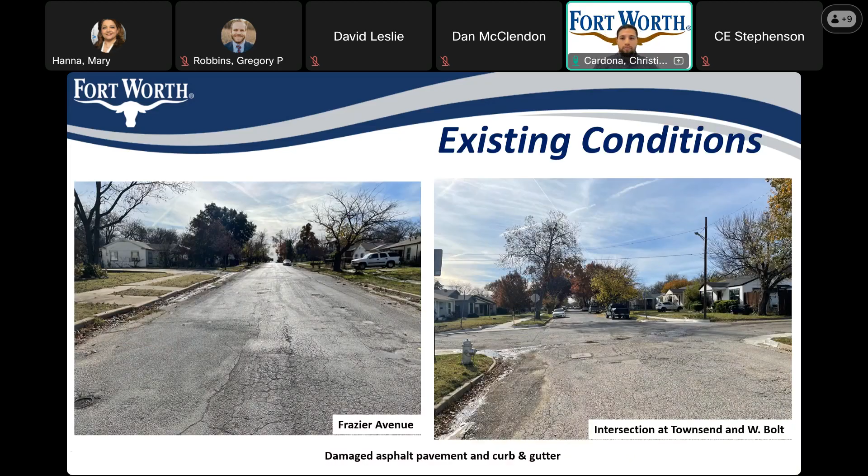Next we'll move on to a couple more photos of the existing conditions. You can see similar conditions of deteriorated asphalt all along these roadways of Wayside and Townsend. You can also see some damaged driveways and sidewalk all along Wayside Avenue. And next are just some additional pictures, just showing some damaged pavement and missing curb and gutter along 8th Avenue.

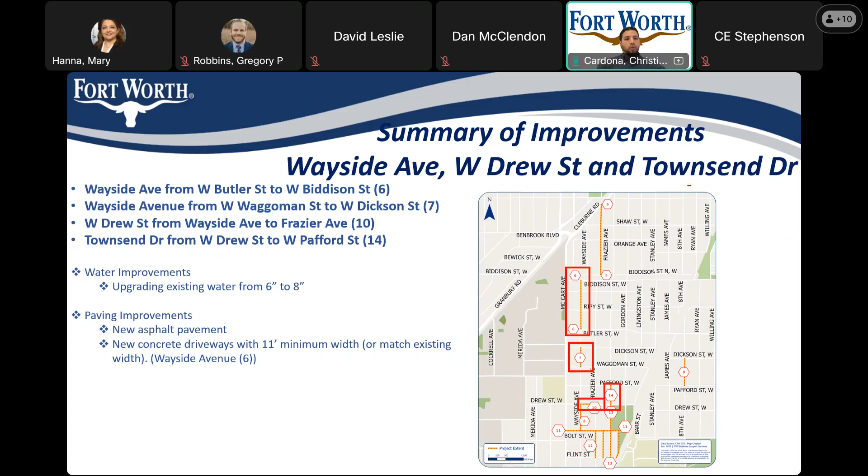Next, we're going to go ahead and move on to construction info. This is essentially just a list of frequently asked questions that residents usually have before the construction phase starts.

So first off, why are we doing this project? As of May 2022, residents of Fort Worth voted to pass a bond program to fund street reconstruction projects and target locations most in need of improvements. In addition to the 2022 bond program, as mentioned previously in the presentation, TPW is partnering with the water department to replace any utilities in need of improvements.

Additionally, you will also receive a 1-day notice on your door before construction starts.

So will our water be turned off? During the construction of the new water line, there will be a few times, and at those times, there will be a few hours that the services will need to be turned off. There's one time to transfer the existing line to the temporary water line to allow the contractor to install the new line. And once the new line is installed, they'll have to turn off the water to transfer from the temporary line to the new water line that the contractor just installed. You will be notified before that water is turned off.

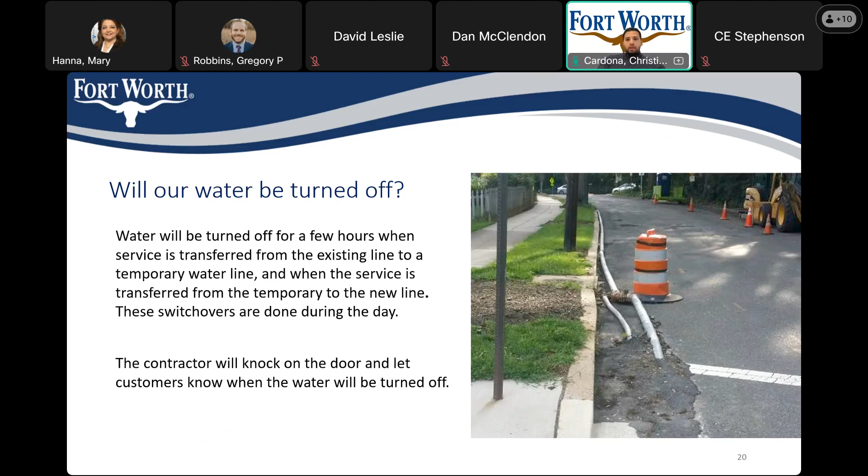Do you replace the water service line up to my house? As part of the project, the city will replace the existing water meter, the meter box, and the service line. So the service line will be replaced up to the property line.

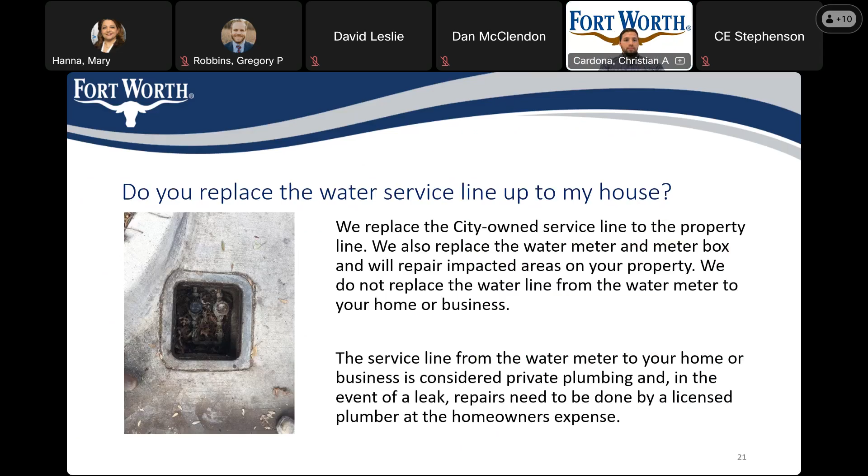If you see running water down the street, don't turn it off. As part of the construction process, the water line has to be flushed and tested to ensure it is free of any contaminants. This is just part of the construction process, so please don't make an effort to try to turn off the water. It's just part of the construction process to make sure that it's flushed and tested.

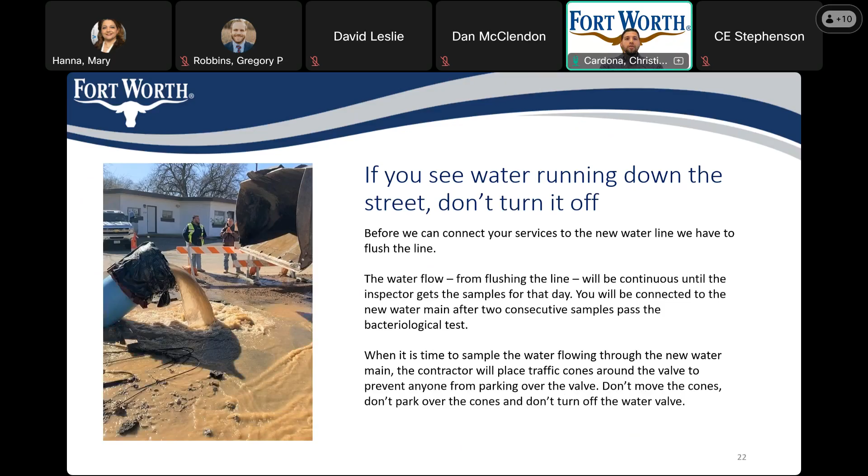So how does the temporary line impact my home and water bill? During the water installation, your service will be connected to the temporary water line. During this time you are connected to the temporary line, your water bill will be based on previous usage.

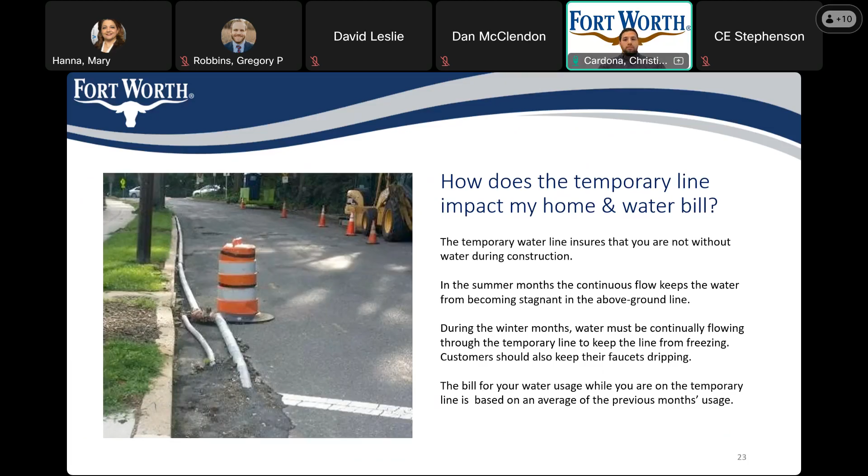Will you need access to our property, or will our services be disrupted? In most cases, we will not need access to your property, as all the work will be within city property. However, in the case that we do, we will let you know ahead of time. Also, you will not be interrupted during the installation of the sewer service.

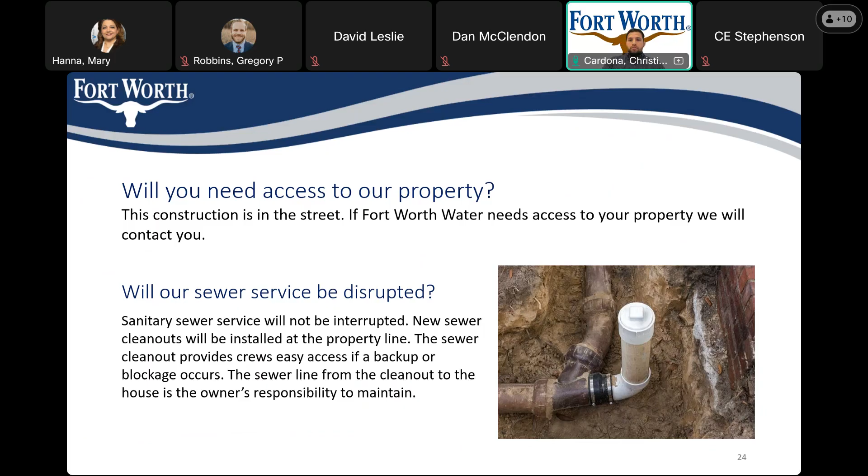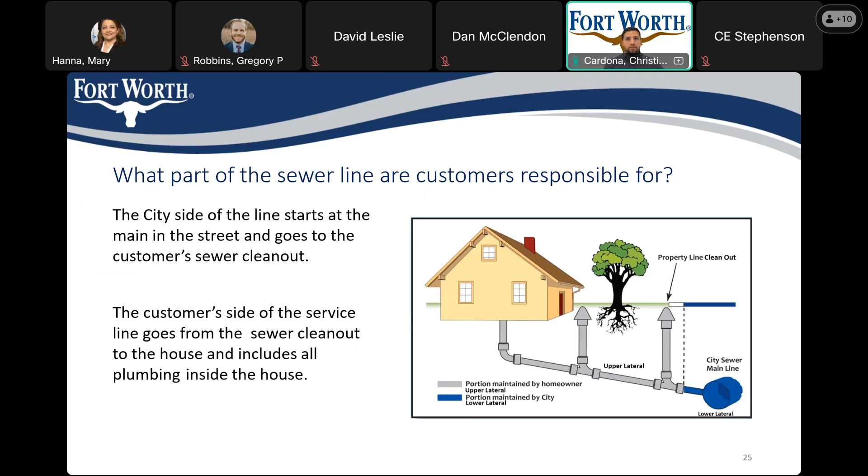Will the construction affect my irrigation? In the case that you do have a sprinkler system, the contractor may ask you to turn it on to locate it before starting any work near those areas.

Are we getting new curb, gutter, and sidewalks? All curbs and driveways will be replaced on bond-funded streets. For water department funded streets, limited portions of the existing curb and gutter will be replaced. Sidewalks will be included in the majority of the bond-funded streets.

Will I be able to access my driveway? During most of the construction timeline, you will have access to your driveway. The only time you will not have access is if the contractor is paving directly in front of your driveway or replacing your driveway itself. But they will coordinate with you ahead of time to make sure you know when your driveway is not accessible.

What happens if my property is damaged? The contractor is responsible for taking before pictures and videos, but we also encourage everyone to take their own before pictures and videos in case property does get damaged.

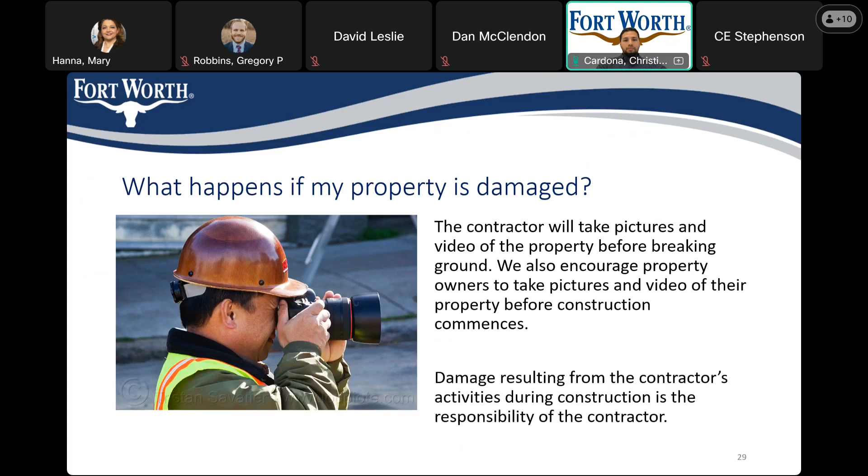Will there be lane closures during construction? During construction, there will be lane closures during the water and sewer installation, as well as for subgrade preparation and paving. There will be signs on each end of the roadway to alert motorists of this lane closure.

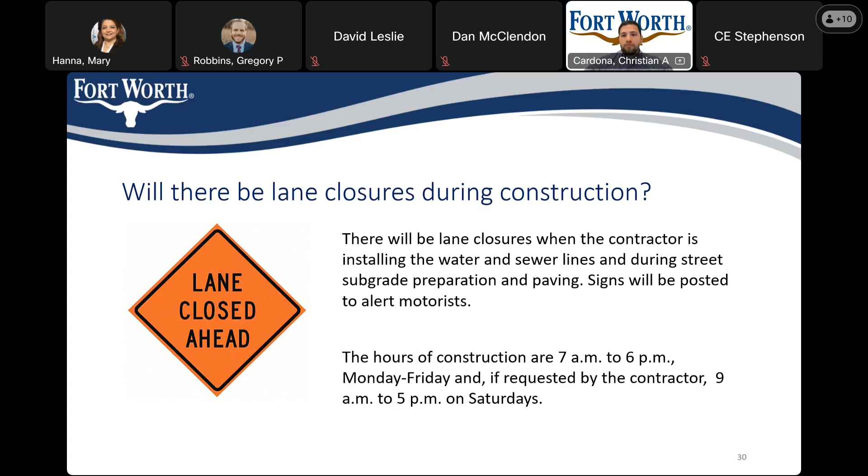Will the city's trash truck be able to pick up my trash and recycling during construction? In the case that your side of the street is closed, the contractor will move the trash to the opposite side of the street so that it can be collected for all of the residents.

We'll go ahead and move on to construction phasing and schedule. Here are some typical photos of the construction process. For these type of projects, water and sewer line installation will be first. Once that is complete, the contractor will install temporary pavement to allow traffic in and out until the paving contractor starts their work on that specific street.

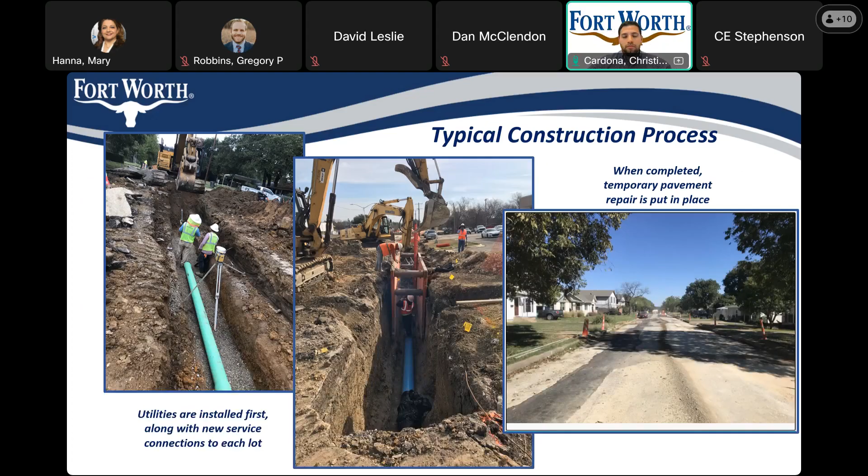Here are some typical construction photos during a concrete pour. This is the concrete construction process. For concrete streets, existing curbs, driveways, and pavement are removed. Then pavement and curb are installed together, and driveways are installed last.

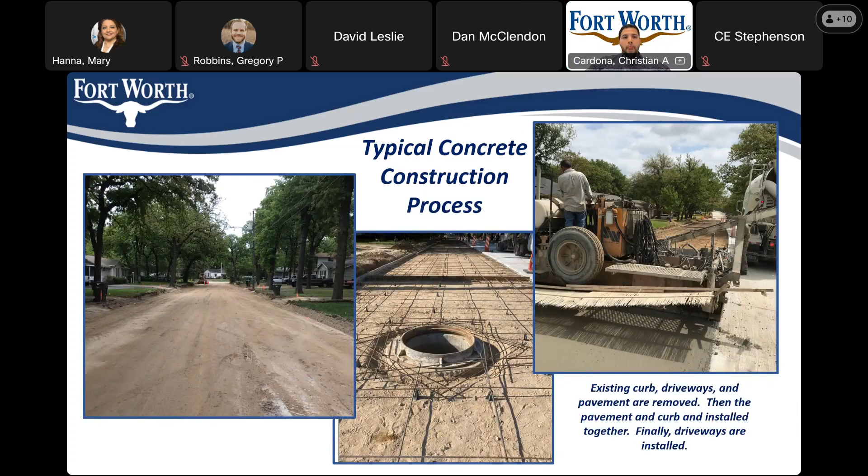For the typical asphalt construction process, existing curb and driveways are removed and replaced first, followed by the demolition of the pavement itself, and the installation of the asphalt pavement follows after.

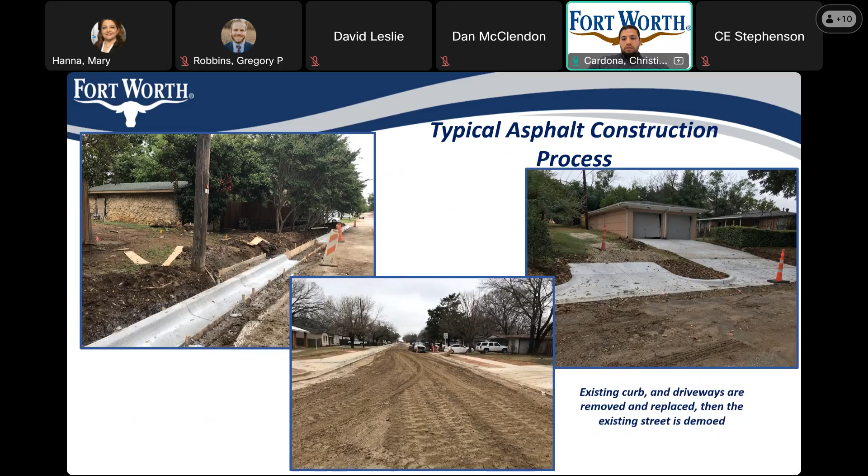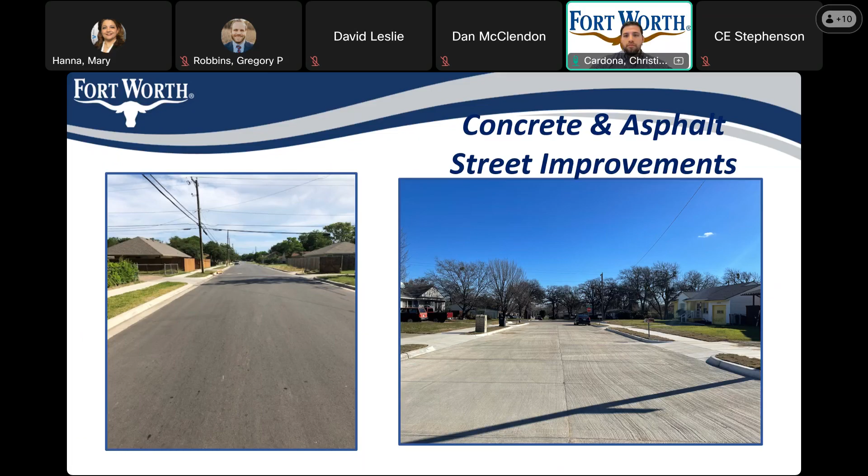Utility improvements for Carver Drive, Fernando Drive, and Prevost Drive are anticipated to start April of 2025 and finish in July of 2025, followed by paving improvements anticipated to start in September of 2025 and run into January of 2026.

For Fraser Avenue, Townsend Drive, Boat Street, and Drew Street, utility improvements are anticipated to start in May of 2025 and end in February 2026. Pavement improvements are anticipated to start in January of 2026 and end in June of 2026.

For Fraser Street North and Wayside Avenue, utility improvements are anticipated to start August of 2025 and end in February 2026. Pavement improvements are to start in October of 2025 and end February 2026.

For 8th Avenue, utility improvements are anticipated to start sometime in December of 2025 and finish in February 2026. Pavement improvements for 8th Avenue are anticipated to start in February 2026 and finish in July of 2026. This brings our finished construction to sometime in July of 2026.

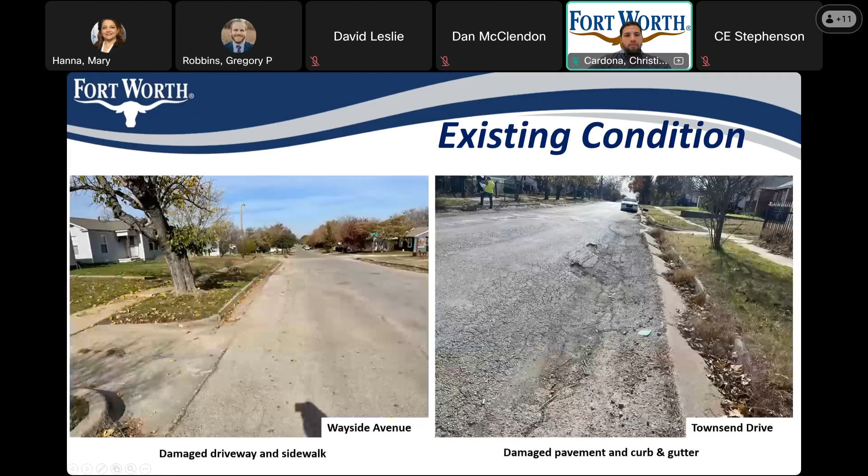Okay, the next question I see in the chat is, who do we speak to if we want to add a school speed bump on our street, since McCart is the next big street and cars drive on Wayside to avoid slower speed limits but go extremely fast? If you would, please send Christian an email with your concern separately, and we will make sure that gets to the correct people.

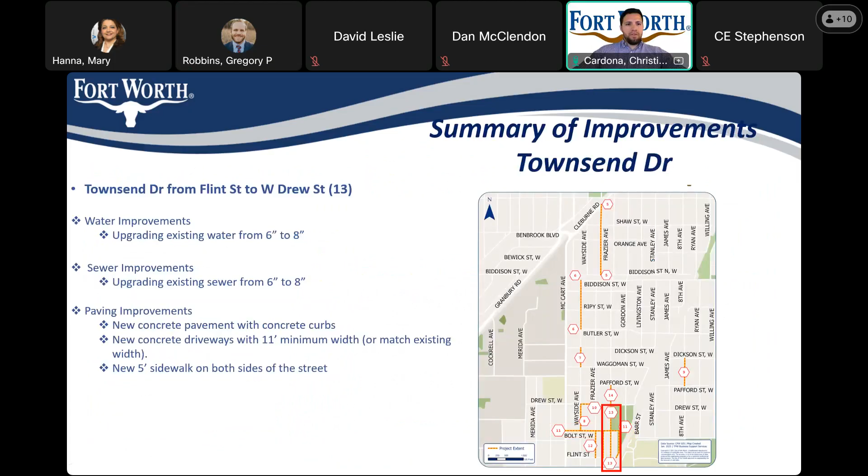There's a question: can you please pull up the slide again showing which streets are water department funded and which are bond funded? Sure, Christian, can you go back to that slide? Yes, I'm going over there. Give me just a second, sorry. All right, now the slide's pulled up, and on the very end of the street limits there'll be a dash, and they'll have either bond funded or water department funded. So that's how you'll be able to decipher which one's which.

And I believe there was a link sent by CE Stephenson of when their bulk trash is picked up, their schedule. But we could take a look into that with Dan McClendon, the contractor, and ensure that bulk trash is picked up. I'm assuming it's probably the first weekend of the month or second weekend of the month. I think that's how they usually do it.

Okay, so we did get a response. Regarding bulk trash, from Dan McClendon: we have equipment that can move bulk trash to a place on the street where it can be accessed. There will be very few times during the job that this would be an issue. So it sounds like the contractor does have equipment to move the bulk trash so that it can be picked up.

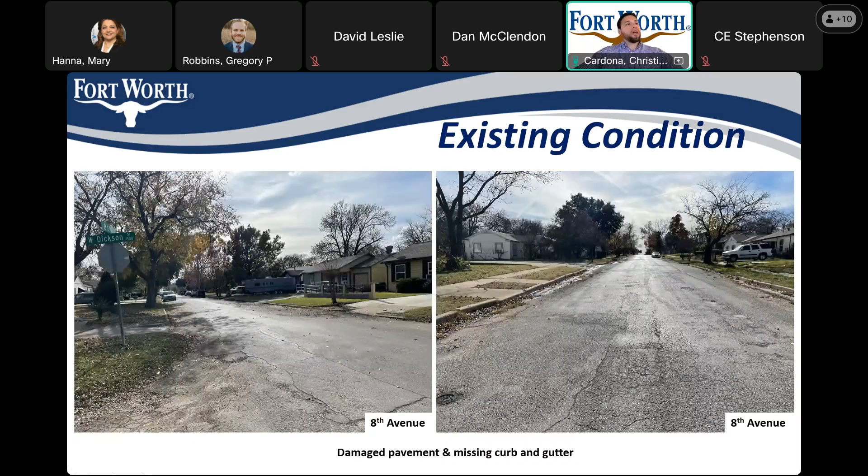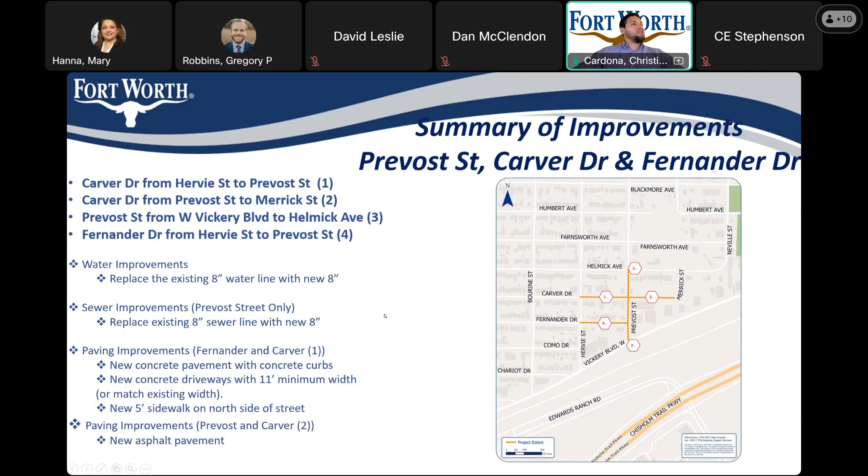Another question from Juan - he joined late and asked about replacing water services on Wayside Avenue. We are replacing water lines on all portions of Wayside Avenue, getting a new water line and new services all the way up to the property line. These will also be getting new meters, and where there are existing meters, they'll get new meters and new meter boxes. There are a couple of portions of Wayside we're doing, all with proposed new water lines to be installed.

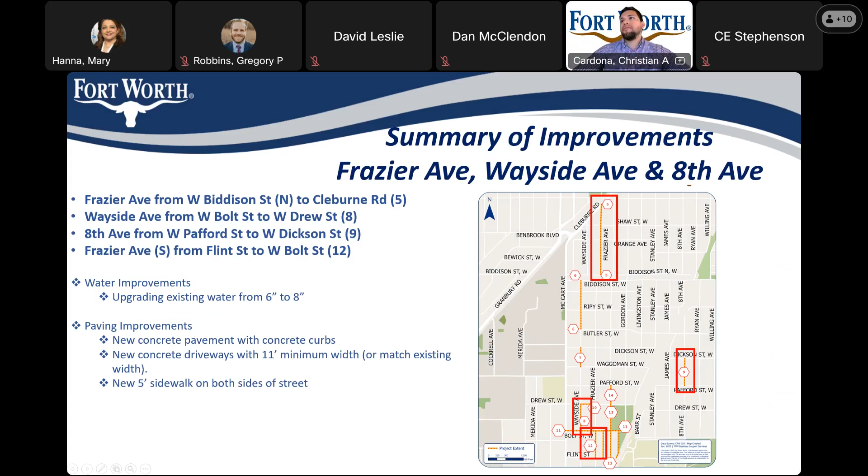Okay, I believe we've covered every question in the chat. If there's anybody else on the call that would like to either enter a question in the chat or unmute yourself to ask the question, now is the time.

Hello, we can hear you. I just wanted to clarify something - I was going to ask about the tree because on my property there's a large pecan tree between the street and the sidewalk. Over the years the roots have grown to the point where the sidewalk is lifted. I've contacted the city forestry now three or four years, and nothing's been done about it. So I was wondering, if they're putting in new sidewalks, will they end up having to go around it, or will they have to remove it?

Stephenson, if you can send your information of where you live, we can take a look into this and see what area you're talking about. We do go on site visits with the city forester to determine if trees can be removed or not, especially if it's in city right of way. If it's in city right of way, he will ultimately make the determination if that tree can be removed or not.